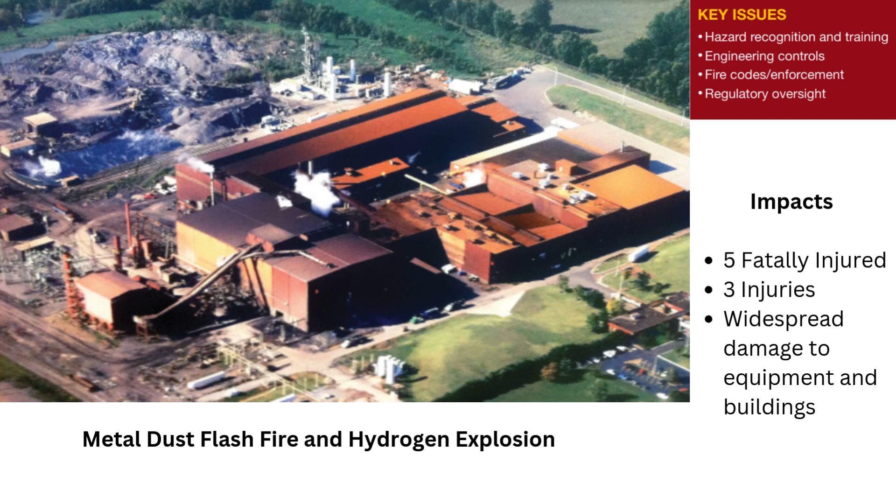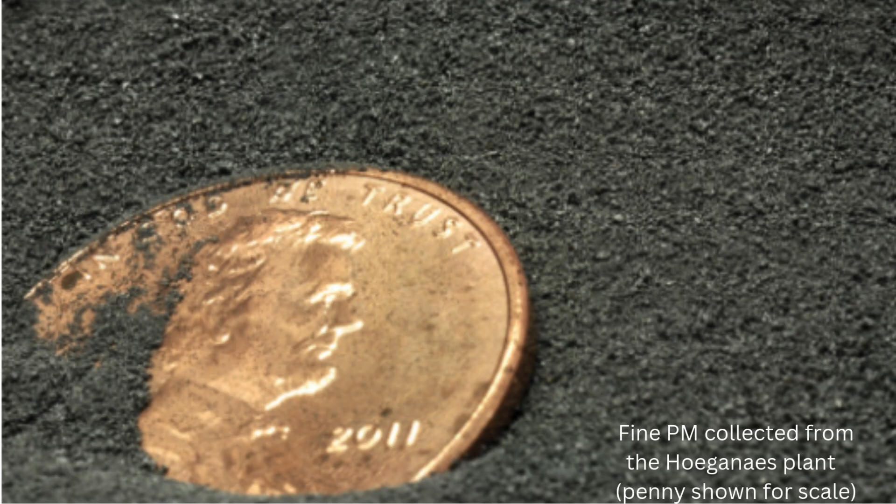In 2011, the Hoeganaes Corporation facility in Gallatin, Tennessee, experienced 3 devastating incidents involving iron dust flash fires and a hydrogen explosion. These events occurred on January 31, March 29, and May 27, resulting in 5 fatalities and 3 injuries.

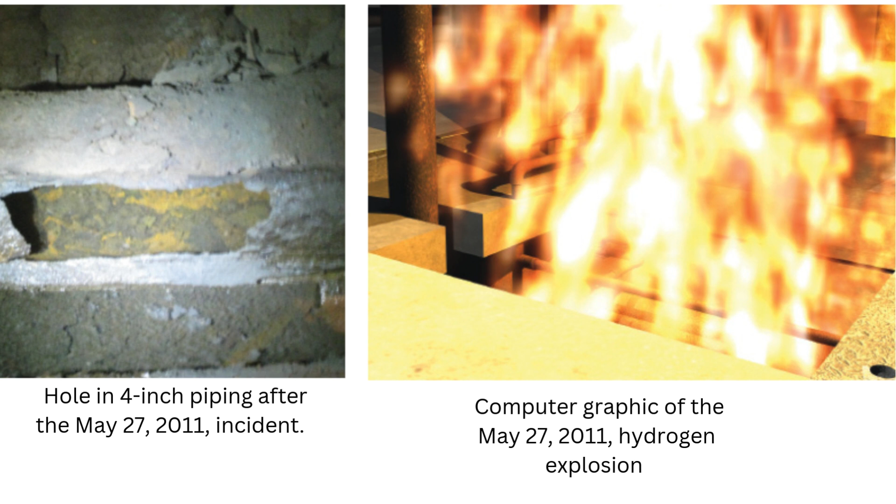The explosions caused widespread damage to equipment and buildings, with substantial operational and financial consequences for the company. The incidents underscored severe shortcomings in safety systems, hazard awareness, and regulatory compliance.

What happened? On January 31, 2011, workers were restarting a bucket elevator after maintenance. Over time, combustible iron dust had accumulated inside the equipment and surrounding areas due to inadequate housekeeping. When the elevator started, vibrations dispersed the dust into the air.

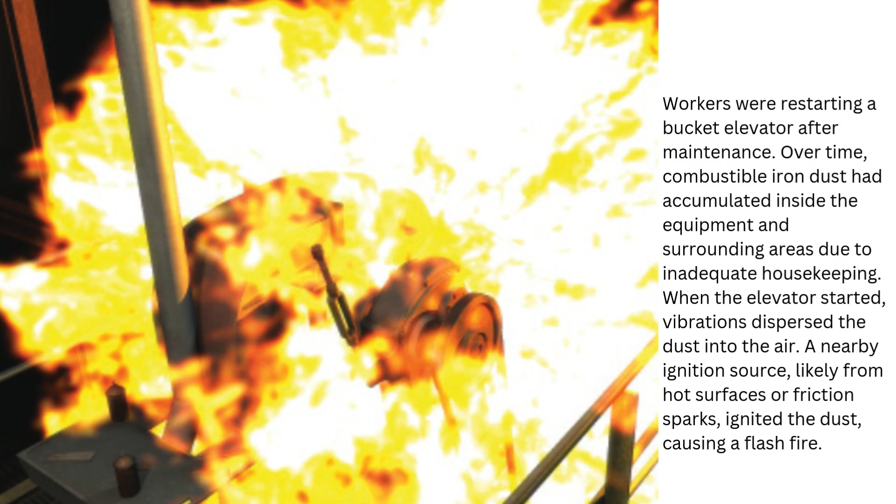A nearby ignition source, likely from hot surfaces or friction sparks, ignited the dust, causing a flash fire. 2 workers in the immediate area were engulfed in flames, suffering severe burns. Despite medical treatment, both workers died from their injuries days later.

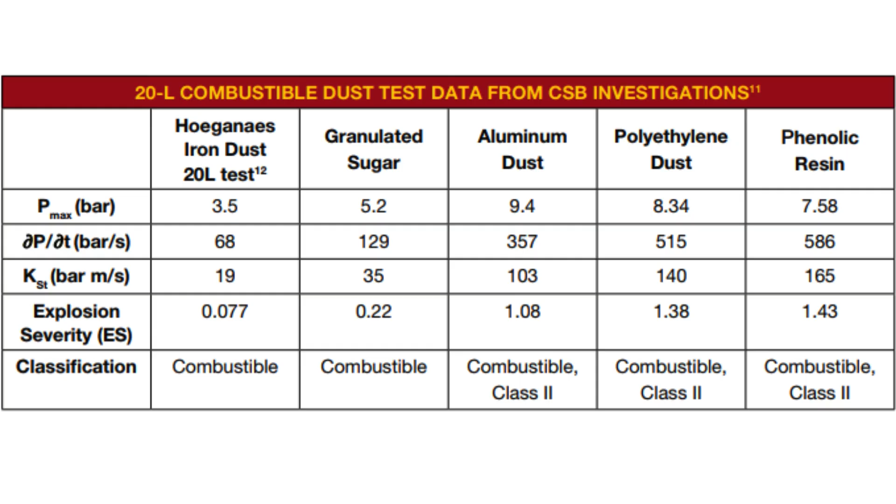On March 29, 2011, an engineer was repairing a furnace within the facility. As he worked, he inadvertently disturbed accumulated iron dust, creating a dust cloud. The dust came into contact with a hot surface, igniting another flash fire. The engineer suffered burns to his thighs and face but escaped the area, avoiding more severe injury.

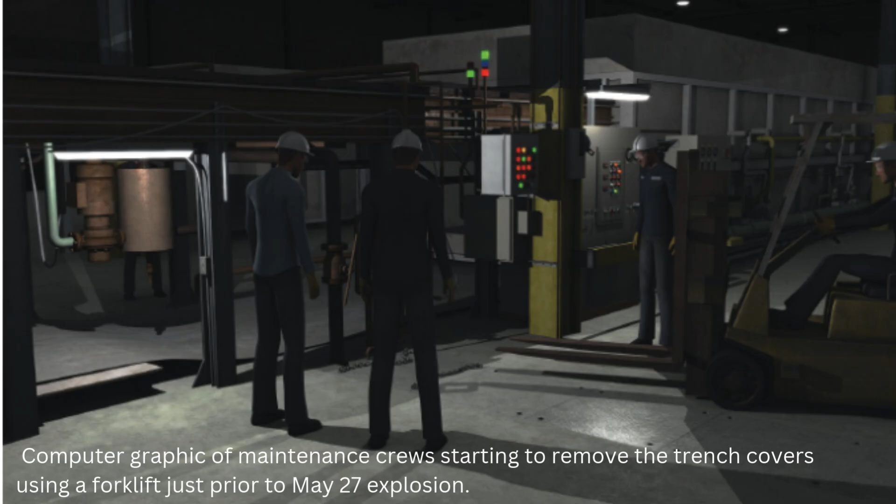On May 27, 2011, maintenance workers investigated reports of a gas leak near hydrogen and nitrogen pipelines. The piping had corroded over time, and flammable hydrogen gas was leaking into the trench below the equipment. As workers removed trench covers to inspect the source, sparks from the tools ignited the hydrogen.

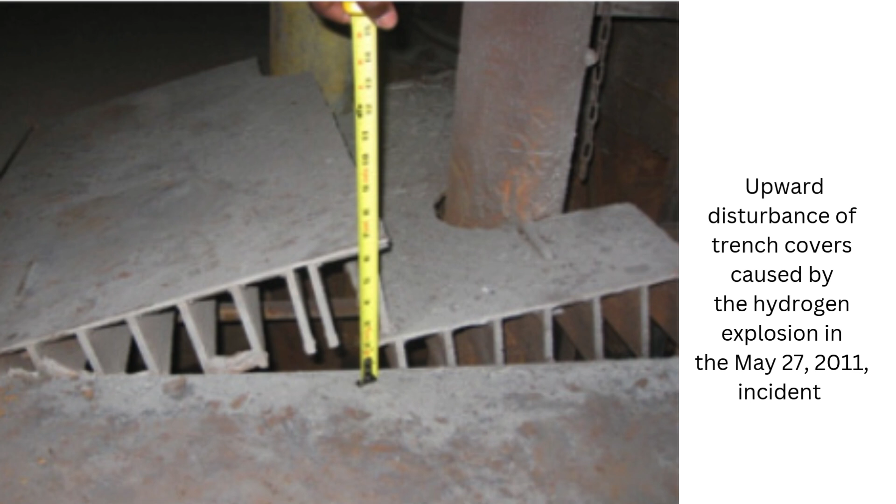The resulting explosion created a pressure wave that dispersed iron dust throughout the facility. The dispersed dust ignited, causing a secondary flash fire that engulfed the area. 3 workers trapped in the fire sustained fatal burns, while 2 others were injured.

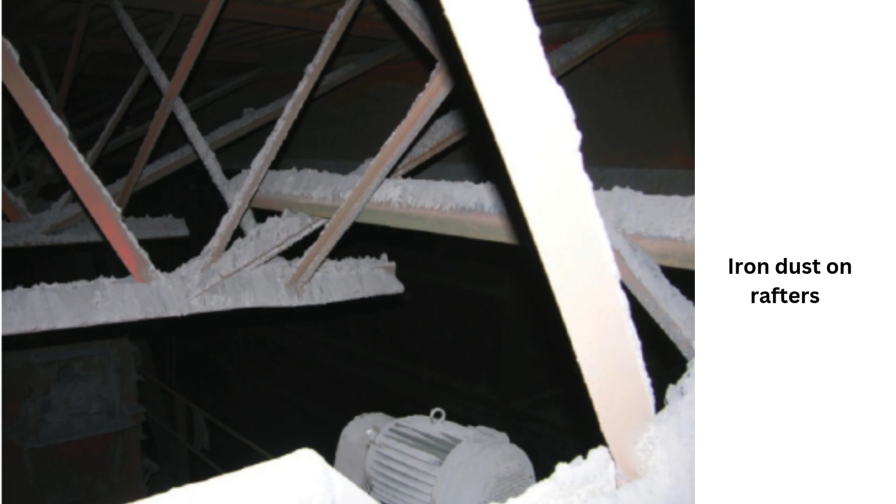What are the root causes? Inadequate dust control. Poor housekeeping allowed iron dust to accumulate on surfaces, creating fuel for flash fires. Failure to address hazards. Management was aware of the combustible dust hazard from prior audits but failed to implement effective mitigations.

Poor maintenance practices. Corroded hydrogen piping and inadequate gas leak detection contributed to the explosion. Regulatory gaps. Weak enforcement of combustible dust and process safety standards, combined with insufficient training, amplified risks.

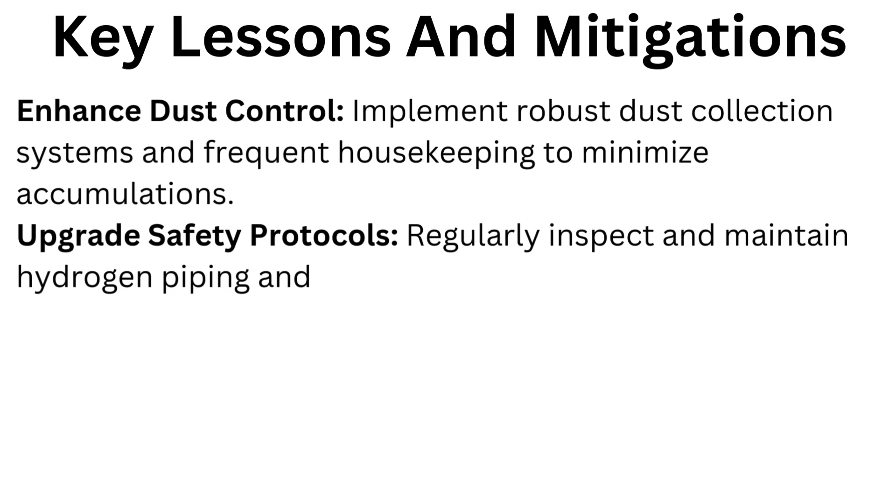Key lessons and mitigations. Enhance dust control. Implement robust dust collection systems and frequent housekeeping to minimize accumulations. Upgrade safety protocols. Regularly inspect and maintain hydrogen piping and enforce comprehensive leak detection procedures.

Improve training. Train employees on combustible dust hazards and ensure routine refresher courses. Strengthen regulations. Adopt and enforce NFPA standards for combustible metal dust management and process safety.